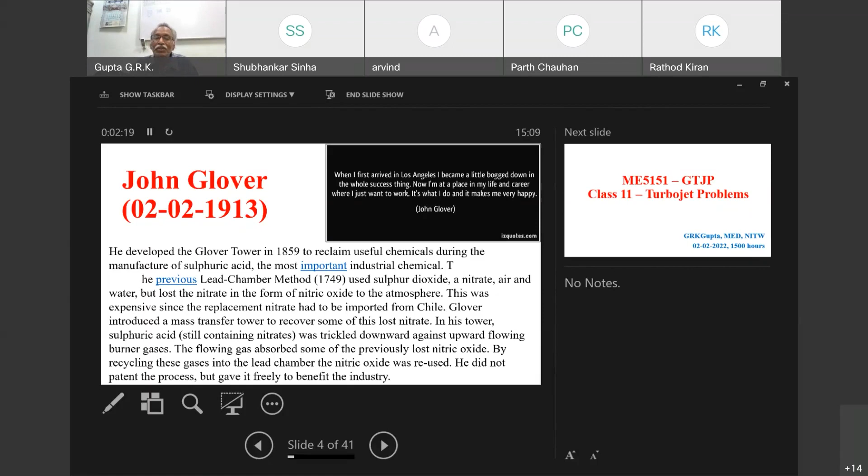He did not patent the process. This is very important because many people try to cash in on everything they find. But he did not patent the process and gave it freely to benefit the industry. There are few people who give everything they found for the benefit of society or the industry. That is the greatness of John Glover.

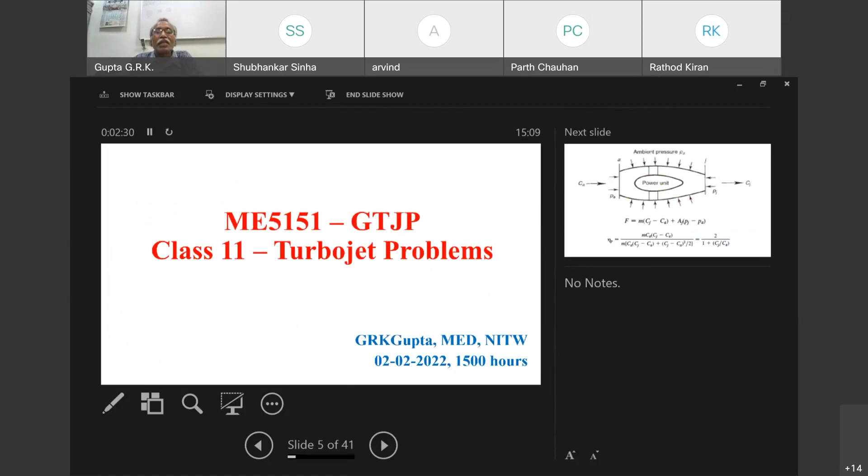Okay, so today we will have this class. Last class we discussed the different expressions for thrust. We have seen that there is momentum thrust and pressure thrust. If the expansion is complete, pressure thrust is zero.

If the pressure expansion is not complete, incomplete expansion, if there is choking, then the jet pressure will be more than the atmospheric pressure, which is critical pressure. So then there will be additional expansion outside the aircraft due to which it gets thrust. That is called pressure thrust, given by Aj into Pj minus Pa. It is due to the pressure difference.

And there is some kinetic energy loss, which is Cj minus Ca whole square by 2. Adding thrust power and kinetic energy loss, we get propulsive power. Thrust power to propulsive power is called the propulsive efficiency. We have seen that if you compare F and propulsive efficiency, if one increases, the other decreases.

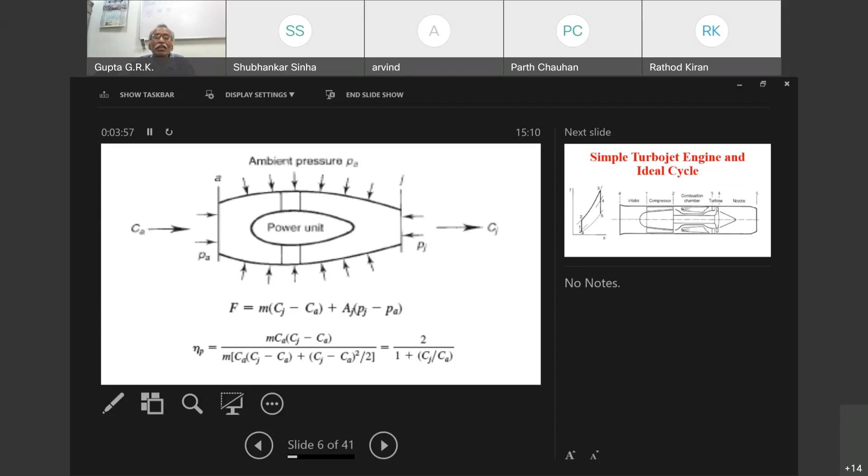If Ca equals zero, I get the maximum thrust. But at that point, the propulsive efficiency will become zero. And if propulsive efficiency wants to be maximum, Cj should be equal to Ca, that is static conditions, then thrust will be zero. Okay, so that's what we discussed in the last class.

If you take a simple turbojet cycle, A is the intake, A to 1 is the intake, 1 to 2 is the compressor, 2 to 3 is the combustion chamber, 3 to 4 is the turbine, and 4 to 5 is the nozzle. The ideal cycle will be like this. In the real cycle, you have losses everywhere you have to show.

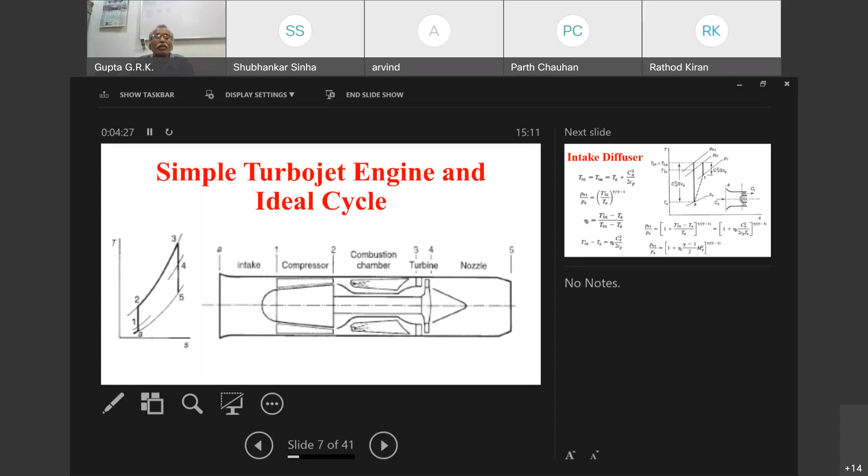Because of the losses, if you add C1 square by 2Cp, then you will get T01, so T01 equals T0. But P01 is less than P0A because of the increase in entropy. There will be a total pressure loss, so P01 will be less than P0.

So the efficiency of the intake will be given in two ways, either intake efficiency or RAM efficiency. For intake efficiency, it is T01 dash minus TA by T0A minus TA. T0A minus TA is nothing but T01 minus TA, which is CA square by 2Cp.

So T01 dash, what we are interested in, is finding P01 and T01 because they are the intake conditions for the compressor. I have to get P01 and T01.

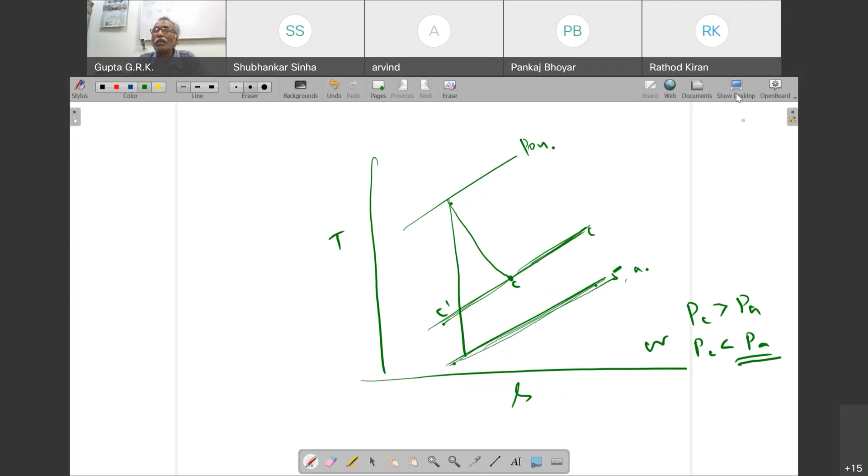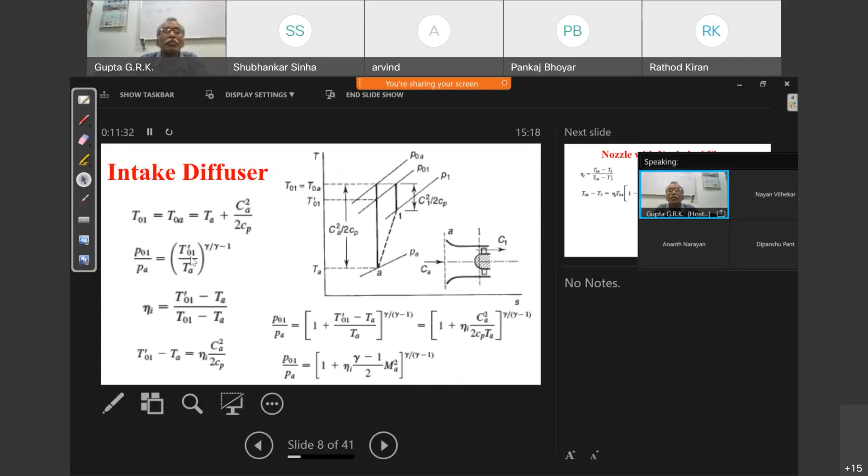I think better I do it. Okay, this is this, and from here, TC dash is equal to T04 minus... so this is the way I get it. And if I want to find out the critical pressure, because if I find critical pressure, then I can check with respect to this. So how to get the critical pressure? P04 by PC, or PC by P04, is equal to TC dash by T04 to the power of gamma by gamma minus 1. So TC dash by T04 I have to know, so divide both sides by T0. So TC dash by T04 is equal to 1 minus, if I take T04 common out of this, 1 by eta J into 1 minus C by...

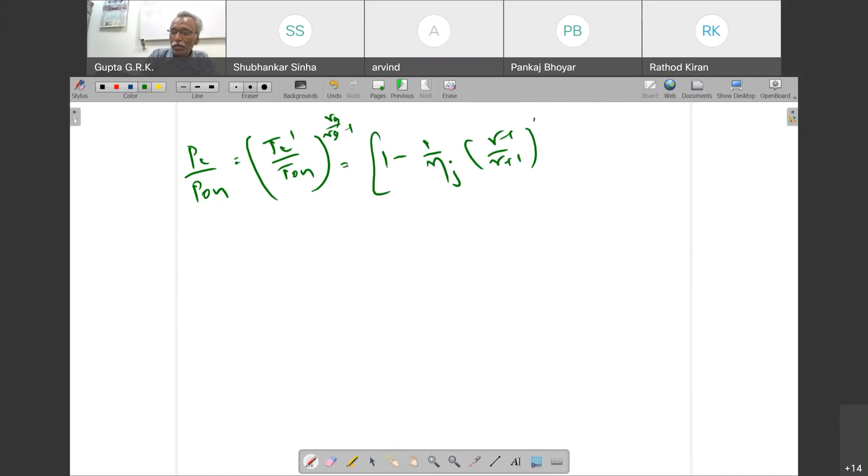So PC by P04 is equal to TC dash by T04 to the power of... okay, this is the formula. So from this, I can get what is PC, because P04 and T04 are already known, so I can get PC.

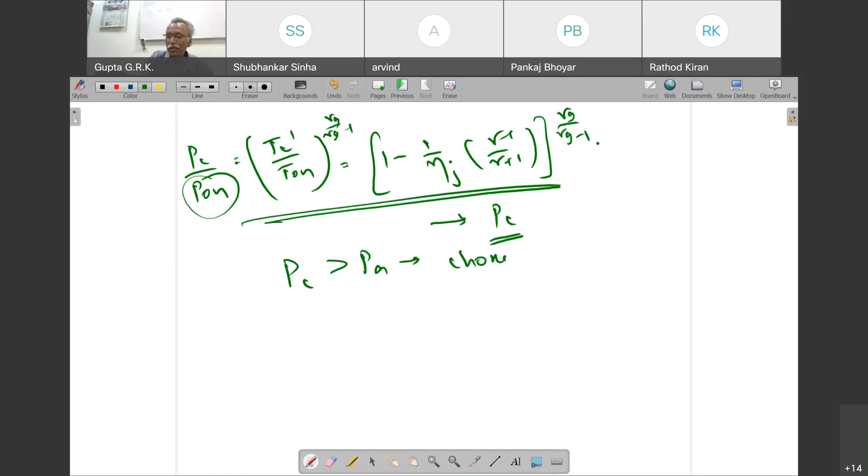Now you check whether PC is greater than PA or less than PA. If PC is greater than PA, it is choking, incomplete expansion, and the exit conditions are critical conditions.

If PC is less than PA, then complete expansion, and P5 is equal to PA. That is this, so in that way I have to see which conditions apply. And if this is the choking, then there will be pressure thrust, because both are different. If PC is less than PA, because P5 equal to PA, no pressure thrust.

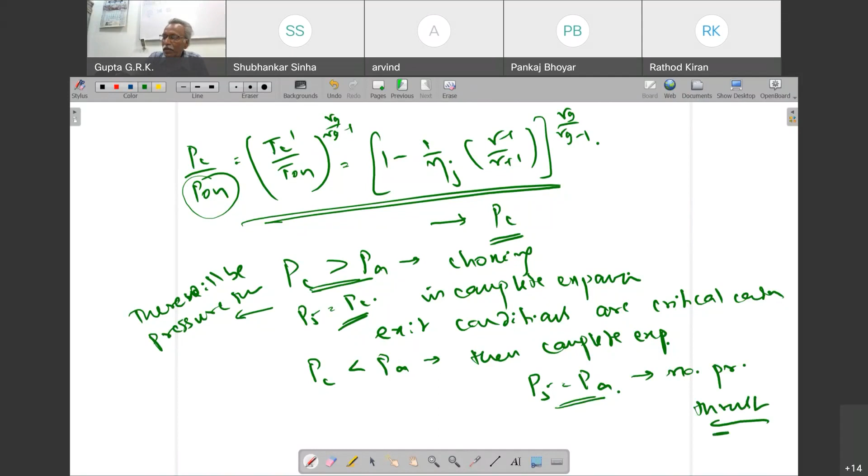Okay, this I have to check. We will see a problem then. Till now, is it okay?

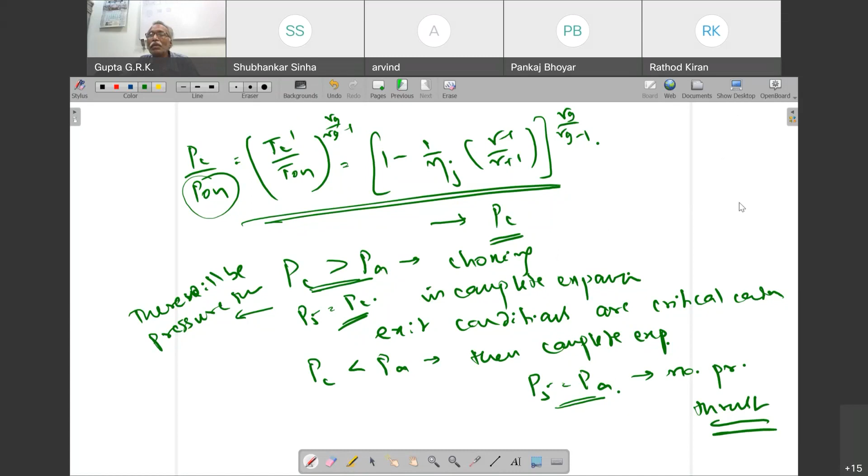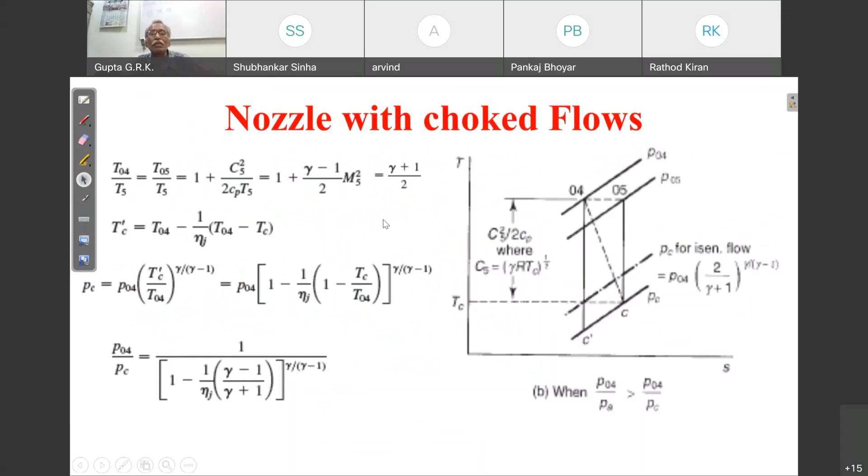Once I know the turbine exit conditions, critical pressure is corresponding to Mach number 1. I could not listen, the voice is not clear. So critical pressure will be corresponding to Mach number 1. Just a minute, I will reduce this.

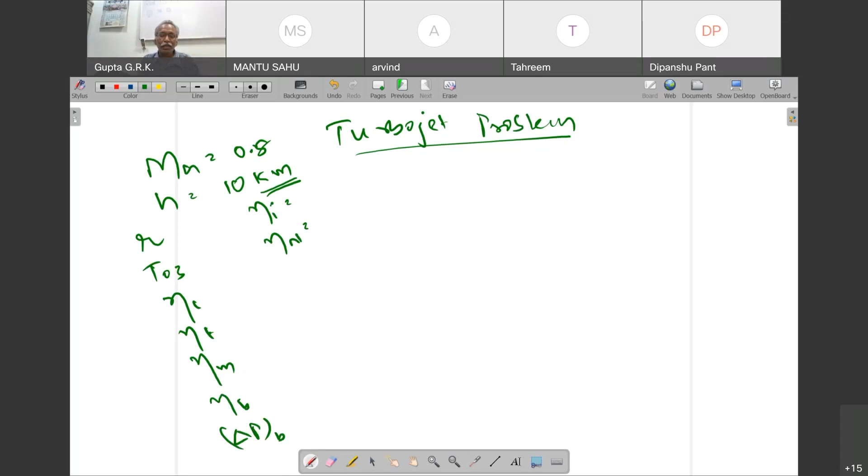So we will see those data. You have Mach number 0.8, altitude 10 kilometers, compressor pressure ratio 8, T03 1200 Kelvin, efficiency of compressor, efficiency of turbine, efficiency intake and propelling nozzle, mechanical efficiency, combustion efficiency, delta Pb. These data will be given to you. And I have to get the specific thrust and specific fuel consumption.

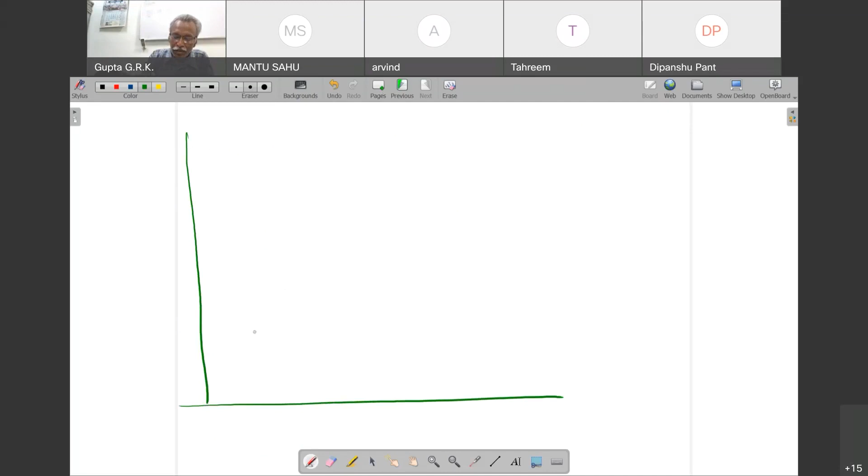So I will tell you stepwise how to go about it. This is A, this is 0A, this is 01. This is for diffuser. And the 01, it enters compressor.

So this will be 02 dash. And there is some pressure loss, I will get 03. Then turbine up to 4. This is 04 dash. And from here 5.

5 dash 5. If there is complete expansion, then this and this will be same, but I don't know whether this and this coincide or not. It depends on whether it is complete expansion or incomplete expansion. If these two coincide, P5 equal to PA, then it is complete expansion. If I have convergent divergent nozzle, then there will be complete expansion and P5 will be equal to PA.

Am I clear about this? Yes sir. Okay, once you understand it, we start calculation. And at 10 kilometers, get PA, comma, TA. These two data from atmospheric tables.

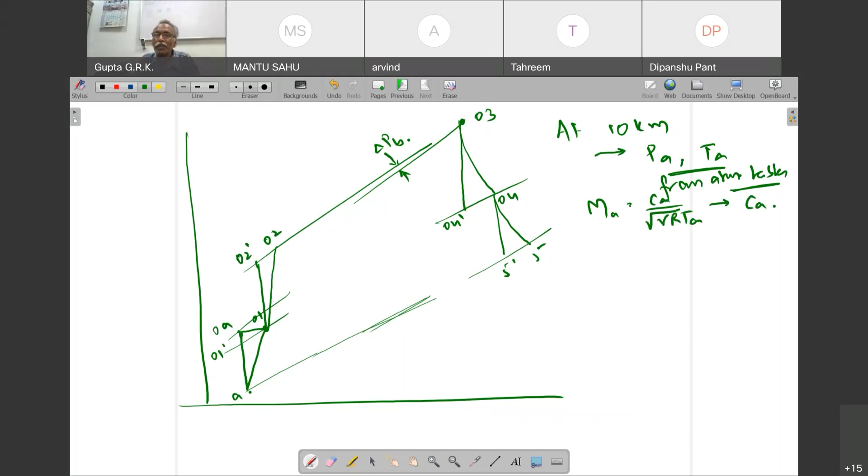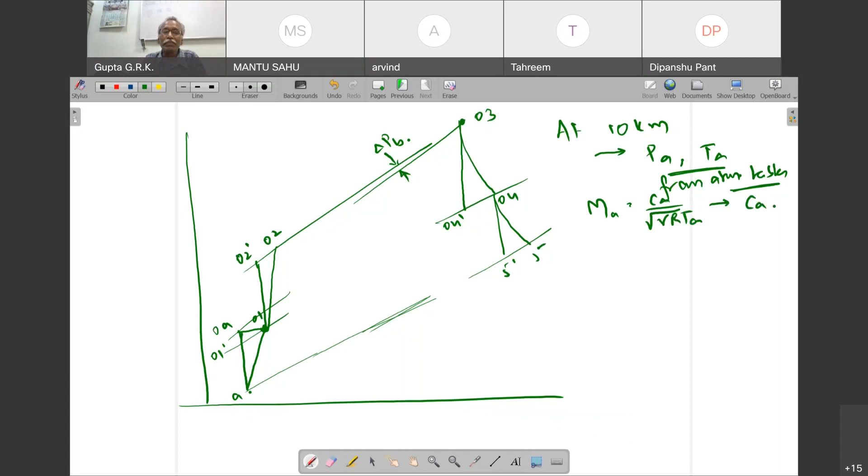So I get Ca. Then first thing is I have to get P01 and T01. So to get P01, T01, first T01 equal to TA, T0A. So T01 is equal to T0A is equal to TA into 1 plus gamma minus 1 by 2 M squared. This is standard formula. T0A by TA is 1 plus gamma minus 1 by 2 M squared. This gives you T01.

Okay, so then get T01 dash. For that intake efficiency ηi is equal to T01 dash minus TA by T01 minus TA. So T01 is nothing but T0A. So this gives me

T01 dash. Once I get T01 dash, the temperature ratio gives me pressure ratio. So P01 by PA is equal to T01 dash by TA to the power of gamma A by gamma A minus 1. So this gives me P01. This completes the diffuser calculation. Is this okay?

Yes sir. So once I get P01, T01, next it will be like the gas turbine calculations only. So we will see step by step. So P01 and T01 are known. Then P02 is equal to RP01, because pressure ratio is given, I can get that.

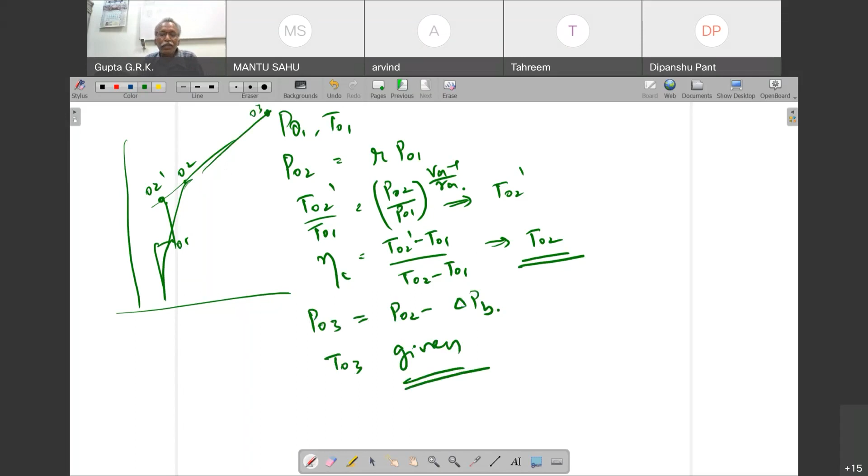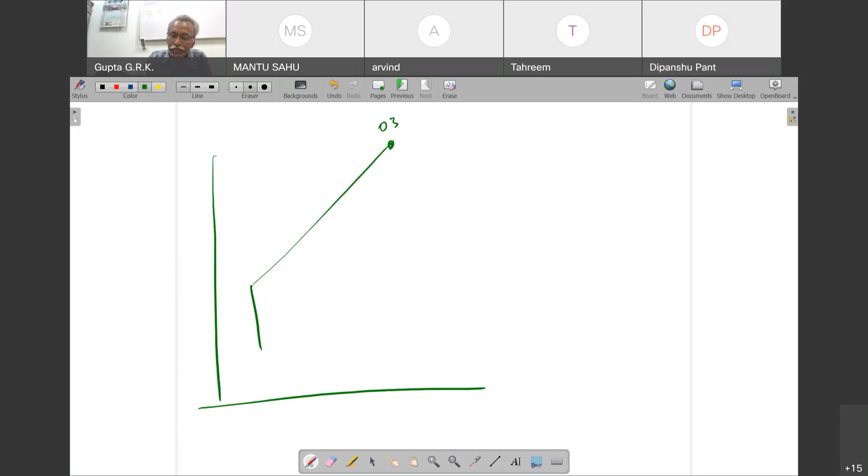Okay, no problem up to this. Then I have to get the turbine. So what is that I have to get? I have to get T04 and P04. How to get that? Anybody can suggest me?

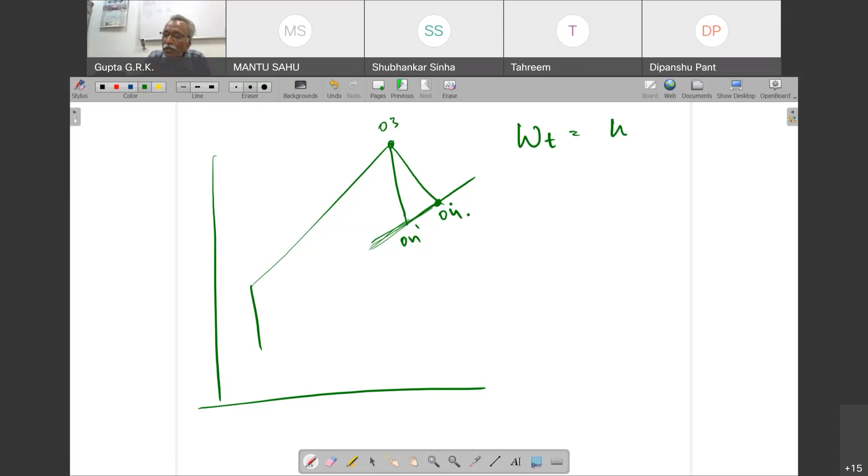Here, how much it has to produce? How much work it has to produce? Sir, compensate the compressor work. Yeah, because it runs compressor only that much. Okay, so turbine work I will get from the compressor work. So W turbine is equal to W compressor by mechanical efficiency. Am I right? Yes sir. So, CPG into T03 minus T04 is equal to CPA into T02 minus T01, divided by mechanical efficiency, out of which the unknown is only T04. I will get T04.

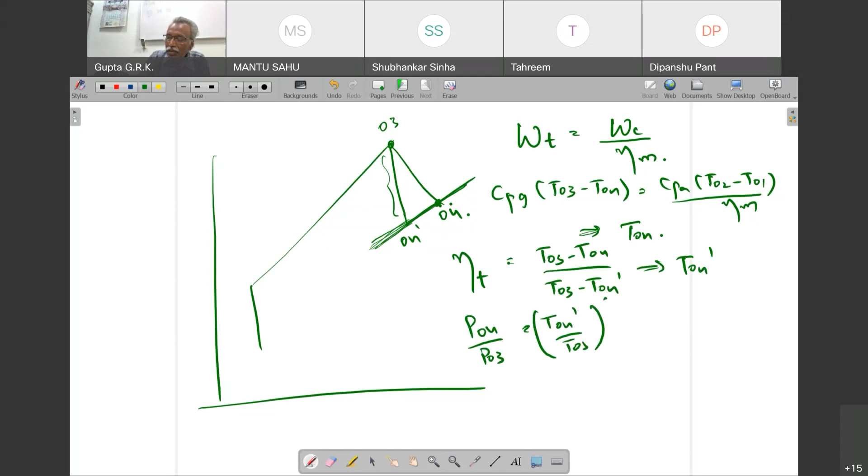And once I get T04, I have to get P04. How to get P04? I have to get this pressure, which is obtained from this temperature ratio using isentropic efficiency. Turbine efficiency is T03 minus T04 by T03 minus T04 dash, so this gives me T04 dash. Then P04 by P03 equals T04 dash by T03 to the power of gamma g by gamma g minus 1. This gives me P04.

Okay, so turbine exit also it is over. Is it okay till now? Yes, sir. Okay, then I have to come to the nozzle.

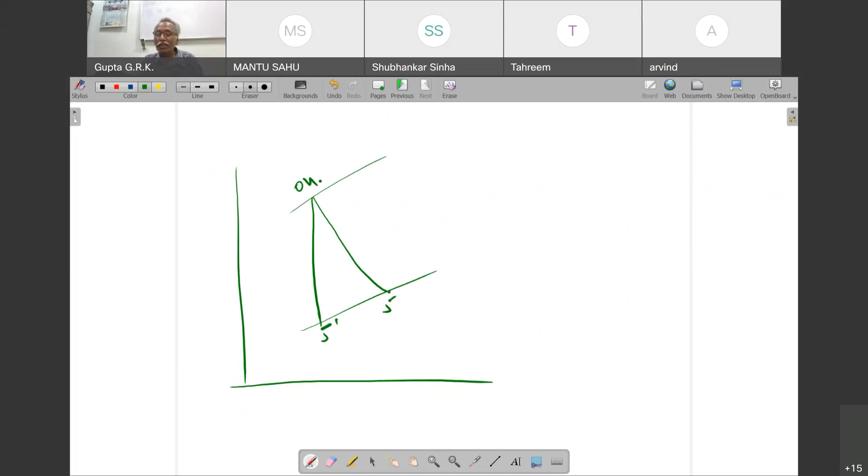So first I have to calculate PC. We got P04 by PC equals 1 minus 1 by eta j into gamma minus 1 by gamma plus 1, to the power of gamma g by gamma g minus 1. So because P04 is already known, you can get PC from here.

Okay, so now you check PC and PA. And in this problem, you will get PC greater than PA. So now it is choked, because it cannot expand up to here, it can expand only up to here. By that time, the Mach number is 1. Is it clear? So this is the exit.

This I will take it as 5 or 5 dash and 5. So this is atmospheric pressure. Okay, so once I know this, then I have to get the critical conditions. Exit conditions are critical conditions.

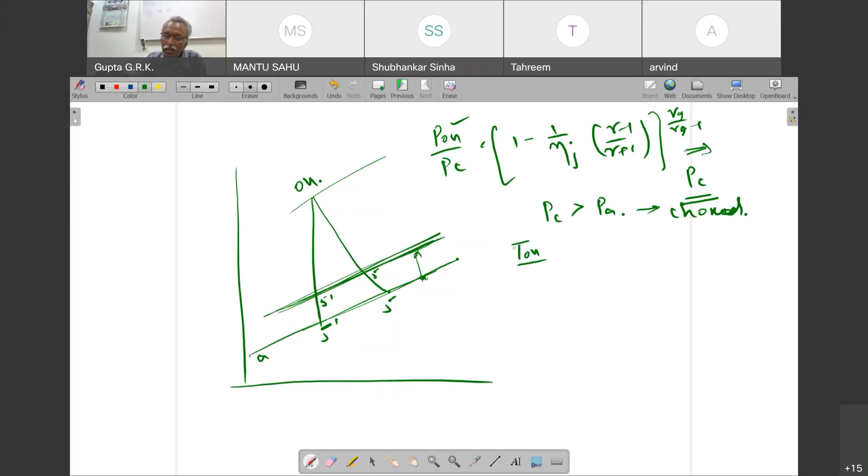Now TC. Okay, so T04, because T04 is T05. So T05 by T5 is gamma plus 1 by 2, because 1 plus gamma minus 1 by 2 M square. M5 is 1, so gamma plus 1 by 2. So T05 is already known, which is equal to T04, so this will give me T5.

Okay, so once I know that, anyhow, I can get critical pressure. Critical pressure formula also will be there. P5 by P05 is 2 by gamma plus 1, to the power of gamma G by gamma G minus 1. So this is the critical pressure.

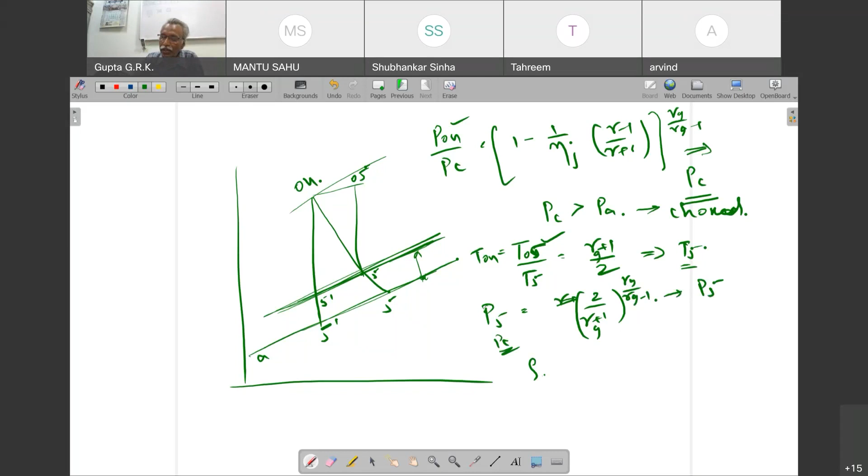Critical pressure formula is this, because P5 by P05 is T5 by T05 to the power of gamma by gamma minus 1. This will give you P5. And rho 5 is equal to P5 by R T5. Okay, so these are the things. And C5, that is Cj, is equal to root gamma R T5.

Are these formulae clear? Because it is sonic velocity, jet velocity is sonic velocity. If I know the temperature, root gamma RT will give me the sonic velocity.

Sir, yes? So PC we have determined already. So PC is equal to P5. So here the formula is also given. So which will be used? Somehow your voice is not audible. I could not see the chat box, that's the main problem. Okay, maybe after the class we will discuss.

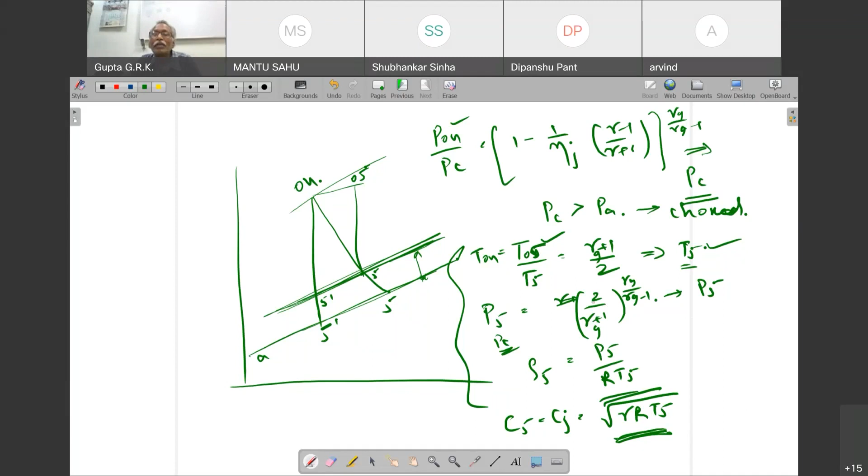Sir, okay, can you repeat after T naught, sir? Can you repeat after T naught, sir? Sir, he's saying, can you repeat after T04? Okay, so T04 equal to T05, right? This is okay.

In nozzle, there is no work transfer, there is no heat transfer. So in the nozzle, exit stagnation temperature is equal to inlet stagnation temperature, T04 equal to T05. Is this clear? Delta Q is equal to dH naught plus delta W. This is 0, this is 0, dH naught is 0, right? So H naught is equal to constant, or T naught equal to constant. So T04 equal to T05 in the nozzle.

And if there is choking, so T05 by T5 is equal to 1 plus gamma minus 1 by 2 M5 square, and this is 1. So 1 plus gamma minus 1 by 2 is gamma plus 1 by 2, the critical temperature ratio, you must be knowing about this. So that's why I can get T5. Is that okay?

Yes, sir. Then P05 by P5 is equal to T05 by T5 to the power of gamma G by gamma G minus 1. So this will give me P5.

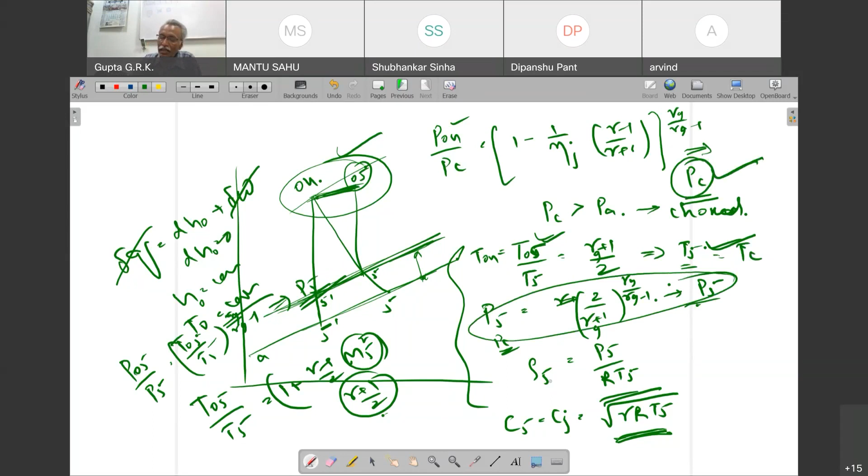Or actually this PC itself, I need not calculate P5, okay? This is not necessary, already PC is calculated. So PC is there, TC is there, and rho C is PC by RTC, and jet velocity is equal to root gamma RTC. So after this, you can do it.

And once I do that, I got jet velocity, right? Jet velocity is the one which I am interested in. And jet pressure also is needed, because now the thrust is equal to F momentum thrust plus F pressure thrust. And momentum thrust is, and I will take specific thrust, okay, per unit mass flow, Cj minus Ca plus Aj by m dot into Pc minus Pa.

So this is the critical pressure, and this is ambient pressure. And Aj by m dot, how to get it? M dot is equal to rho 5, A5, C5. C5 is jet velocity, A5 is nozzle area. So A5 by m dot is equal to 1 by rho 5 C5. Rho 5 is known, C5 is known. I substitute here, so Cj minus Ca plus 1 by rho 5 C5 into P5 minus Pa. So this is the way I get the specific thrust.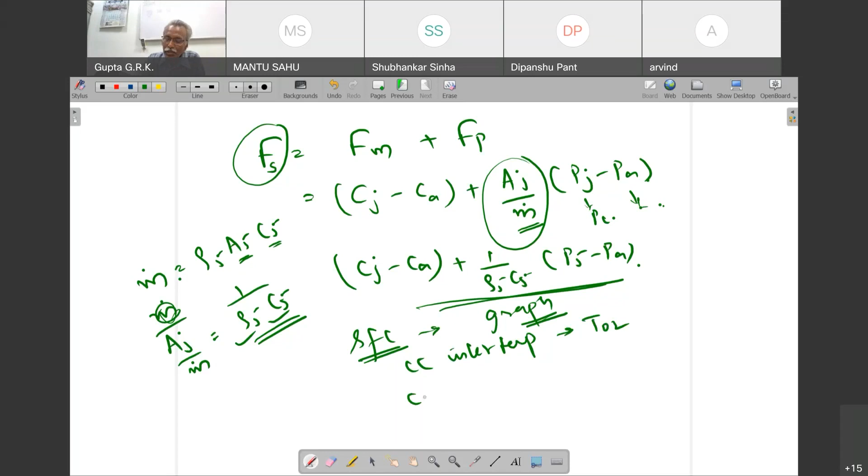And then SFC is to be found out. For this again, I have to use the graph. For the graph, what I have to know is the inlet temperature to the combustion chamber, that is T02, and combustion chamber temperature rise, that is T03 minus T02. This gives me fuel air ratio theoretical. Then fuel air ratio actual is theoretical fuel air ratio by combustion efficiency, which is given to you. So fuel air ratio I can find out. So once F is known...

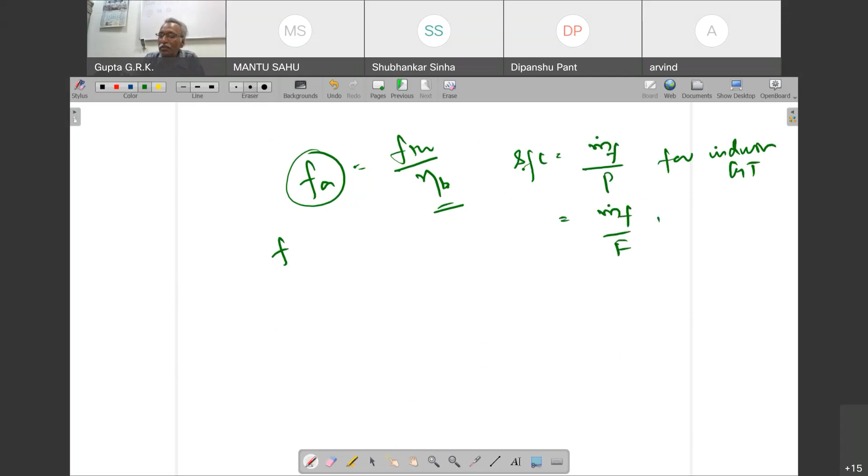So the SFC is m dot F by... here one thing, for gas turbines, industrial gas turbines, SFC is m dot F by power. But this is m dot F by thrust for aircraft engines, so you have to know this. So this is nothing but m dot F by m dot A, specific thrust, that is F by Fs. F is known here, Fs is already calculated, so I can get SFC.

This is kgs per Newton seconds. Because m dot F is kgs per second, and this is Newtons, Newton per kg, then it will be like kg... this has no units... here this is kgs per... it is 1 by Fs, units will be 1 by Fs. This is not having any units. 1 by Fs means kgs per Fs. Fs is F by m dot, that is Newton second per kg. And so this is kgs per Newton seconds.

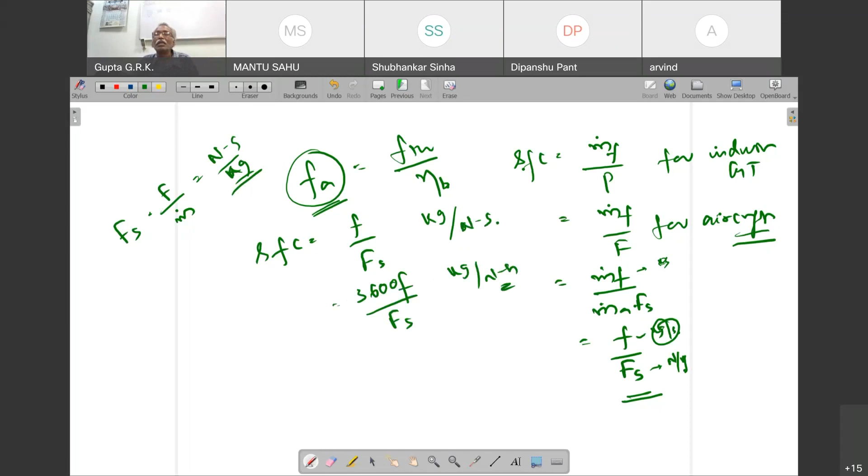And if you actually multiply by 3600, I will get the kgs per Newton hour. Just I will check it. I think this is the one. This is the way I have to go about.

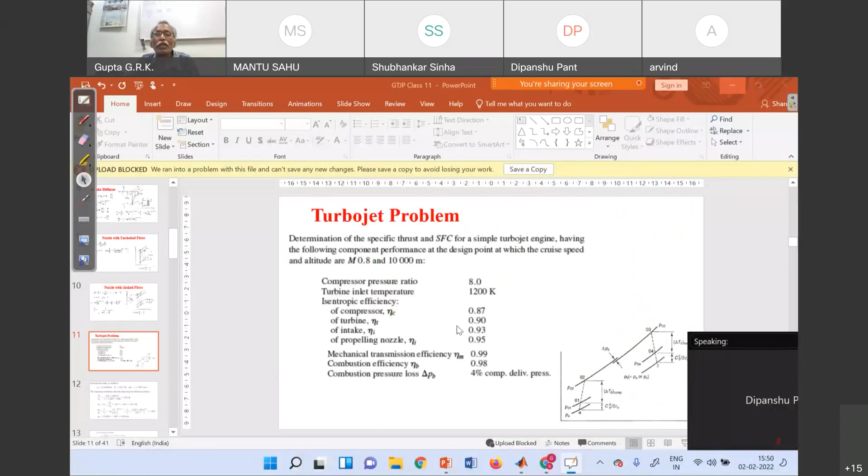Now you can see the stepwise procedure for the turbojet problem. So from ISA table, that is International Standard Atmospheric Tables, at 10,000 meters, PA is this, TA is this, and at their sonic velocity is this. Sonic velocity is nothing but root gamma RT. So these three will be available at different altitudes.

Now, the T01 is equal to TA plus CA square by 2CP, because CA is known. CA square by 2CP I can calculate here, and so here T01 is obtained. So P01 I can get from here. So T01 and P01 using this direct formula he has found out. T01 dash he didn't find, so you can do that way, that will be easier instead of remembering this formula.

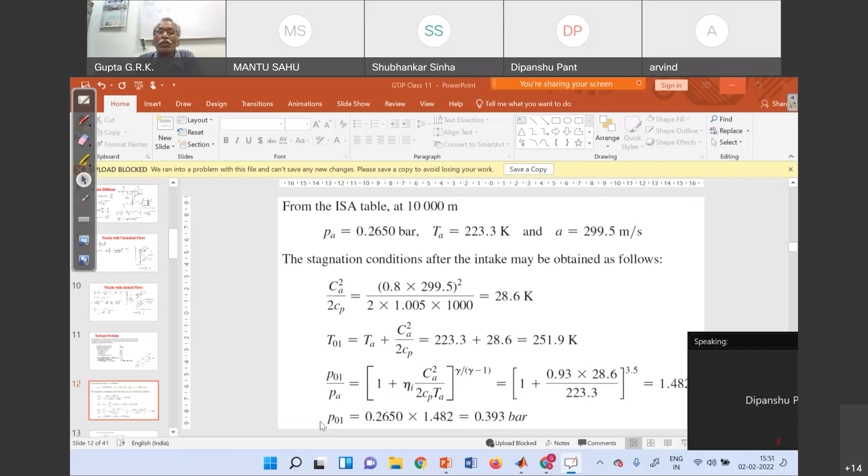So get P01 and T01. Then P02 is equal to RP01, so 8 into this. And T02 minus T01 is this. So again he has found out direct formula, but we are doing T02 dash first you find out, and then T02 you find out.

So now this is the formula, W turbine is equal to WC by mechanical efficiency. So from this I get T04. And the P03 is equal to P02 minus the combustion pressure losses, so this gives me P03. And here T04 dash, again using the turbine efficiency, I get like this, and P04 is obtained.

So once you get P04 and T04, then you get the critical pressure. P04 by PC, this formula is there, so from this formula you can find out this. Then you check: here you found out P04 by PA is greater than P04 by PC, or if you reverse it, PA will be less than PC. So if PA is less than PC, that is PC is more, so it will be choking. And so the critical temperature is 2 by gamma plus 1 T04, and the critical pressure is this.

And rho 5 is PC by RTC, and C5 is root gamma RTC. And A5 by M is equal to 1 by rho 5 C5, right? And then the thrust, C5 minus CA plus A5 by M into PC minus PA. A5 by M is 1 by rho 5 C5, I told you. So this is the way I get the momentum thrust and pressure thrust. So you can see that pressure thrust also is quite a good amount. This is the total.

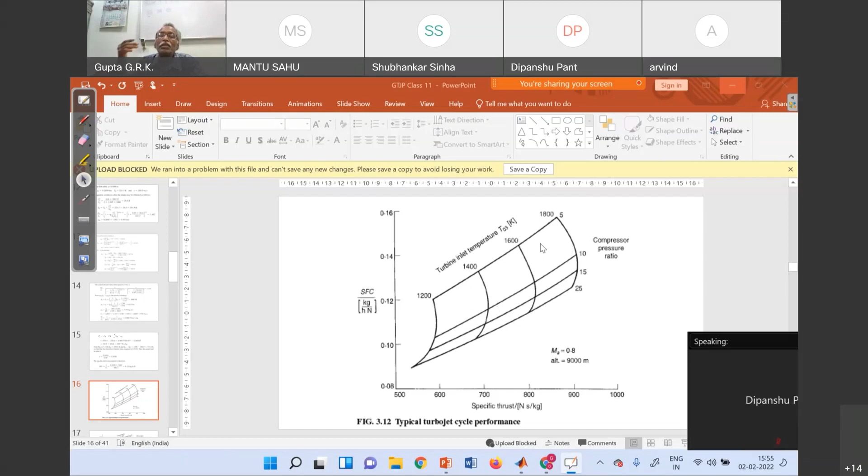And this particular graph is very, very useful. Why? Because, as I told, based on how much SFC I want, based on how much thrust I want, I need to define which area I have to choose. Based on that, I can choose what turbine inlet temperature, what pressure ratio is needed. Okay, I will show you another graph. These are the design considerations.

Okay, another thing: as turbine inlet temperature increases, what happens? The cost increases because I need higher grade, costly materials to withstand those temperatures. And its life also decreases. As turbine inlet temperature increases, the life decreases and cost increases. So these things I have to keep in mind.

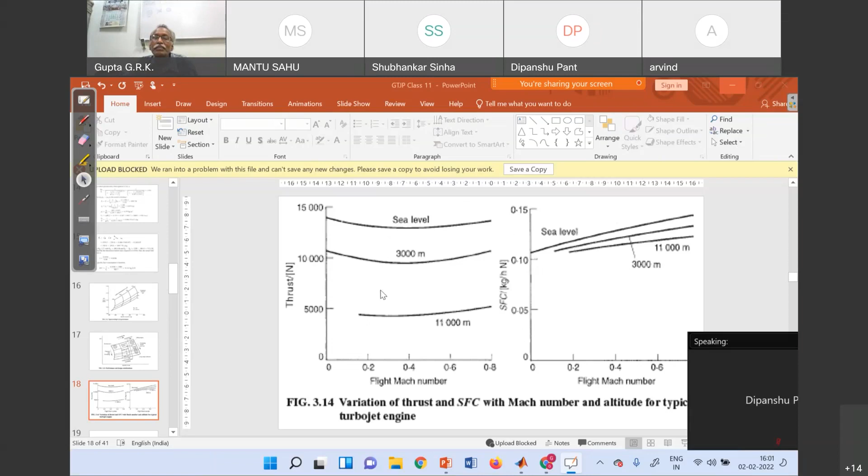Yes, sir. Yeah. So then we go to what is called as turbofan.

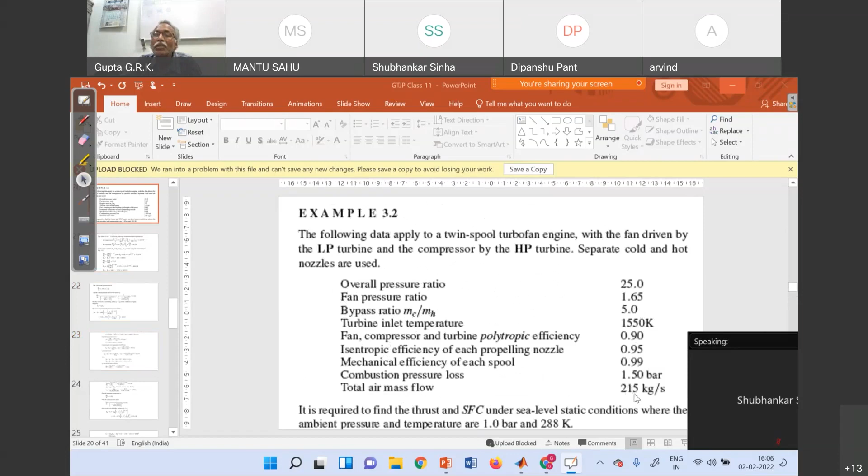Okay, anyhow, don't worry about the formula. You know the total mass flow, and total mass flow is 215, and m dot C by m dot H is 5. So from this I have to find out what is m dot C. Here it is something like this.

M dot C by m dot H is B. And total mass flow m dot is equal to m dot C plus m dot H. So if I divide this by m dot H, this is B, this is 1, B plus 1. So m dot H is m by B plus 1, because m dot by m dot H is B plus 1. So then m dot C, from this, m dot C is equal to B times m dot H, or m B by B plus 1.

Okay, this is the formula as used. M dot B by B plus 1. So that is the way. And the cold thrust I can find out.

In the same way, now I have to find out what are the HP turbine exit conditions. HP turbine work is equal to compressor work. So CPA into fan work is — this is some value, that was previously found out here.

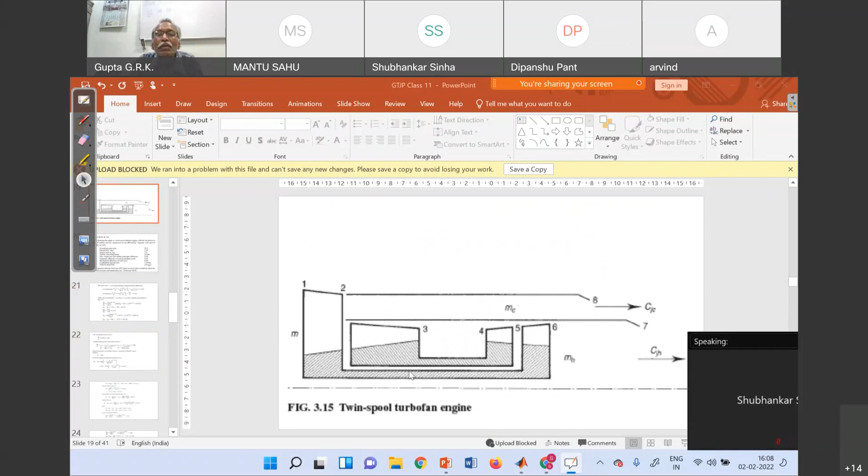T04 minus T05. So T04 minus T05 is equal to CPA by mechanical efficiency times CPG into T03 minus T02. So from this, I can find out what is the HP rotor work. Similarly, LP rotor work, I will get it is equal to T02 minus T01 into CPA by CPG.

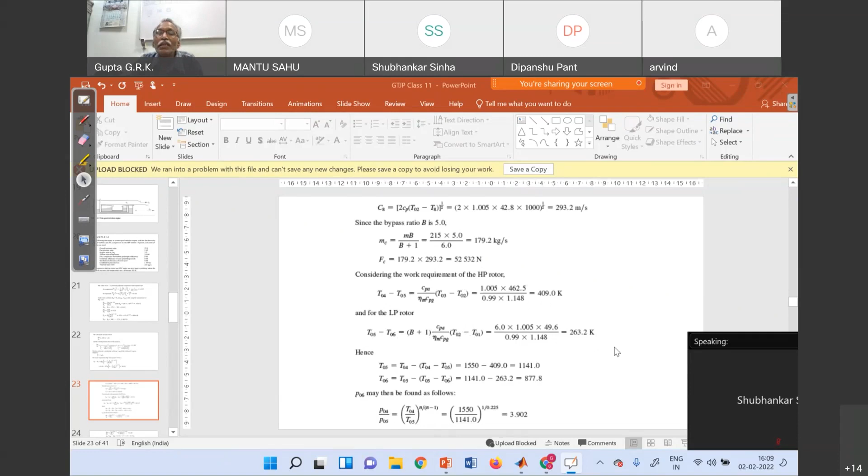So this is the way I can find out what is the turbine work for the HP turbine and LP turbine, based on the compressor work and the fan work. So this is the way I can get the exit temperatures, T05, T06. So in that way, I can get the exit conditions of the second turbine also.

Once I get that, then I can find out again what is the critical pressure here. And fortunately, this is also unchoked. So because it is not choked, there is no pressure thrust, and the exit conditions will be atmospheric conditions only. And based on that, I have to calculate what is the velocity of the jet.

And hot air is m by B plus 1, and so hot thrust is this much. And cold thrust plus hot thrust is this. And again, you have to find out the fuel air ratio from the graph.

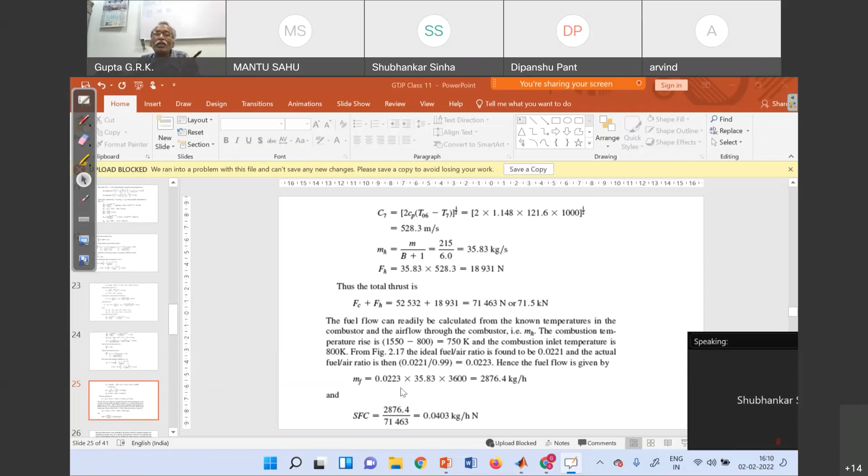And by 0.99 combustion efficiency will give me the actual fuel air ratio. And because mass flow of air I know, multiply that by this, so I will get the mass flow of fuel. And mass flow of fuel is known, total thrust is known, so mass flow of fuel by total thrust will give me SFC.

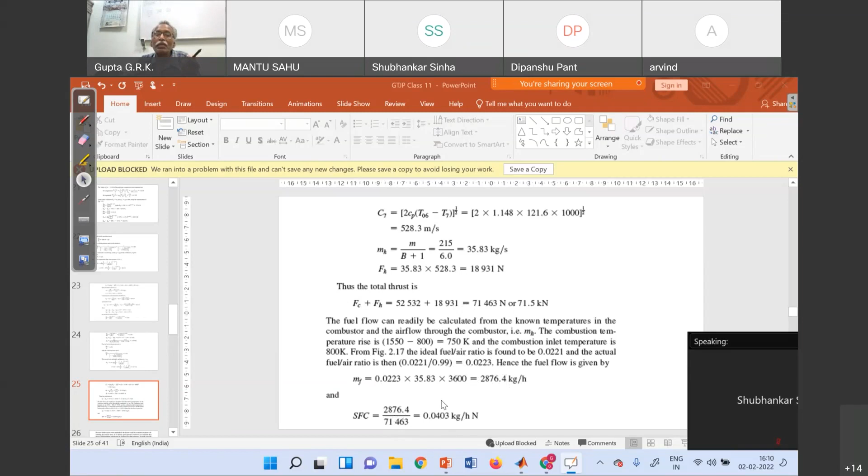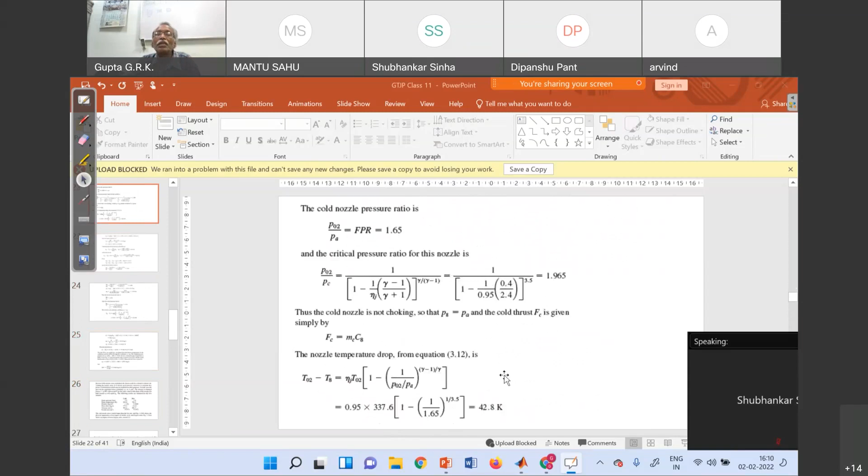Okay, so this is the way I can find out. So you solve the problems, so you can understand how to do that. Go through the worked examples and also the exercise problems, because the next assignment will be based on that.

You know where the problems are in the book? At the end, before the index, you have problems given for all the chapters. I've already given the gas turbine cycles. The next chapter will be turbine cycles, the third chapter. So next assignment will be these problems. Go through that, and if you have any difficulty or lack of understanding, ask in the next class.

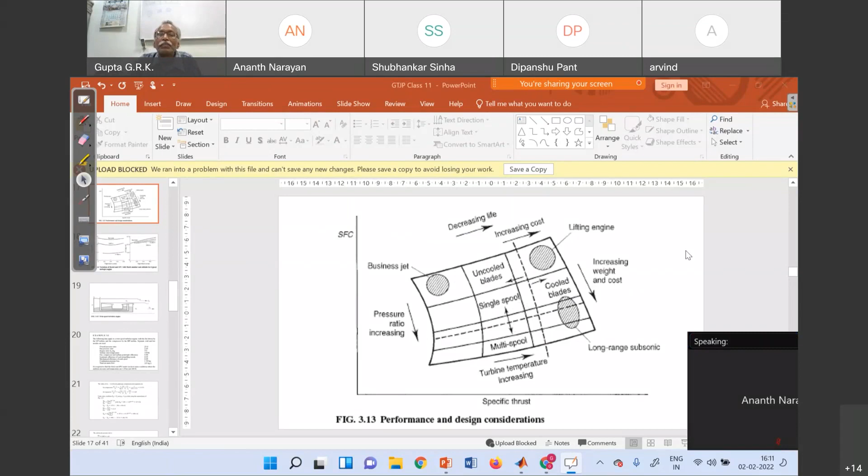Okay, so it is about some personalities. His name is synonymous with intelligence, yet it wasn't always that way for him. As a child, he didn't start speaking until he was 4, and couldn't read until he was 7, and was thought to be mentally handicapped. Who is this person?

Is it Albert Einstein? Yeah, very good, it is Einstein. He went on to win a Nobel Prize and altered the world's approach to physics. I guess he was just thinking of the right thing to say for those first 4 years. So this is great Albert Einstein. That's why don't worry if someone is weak or mentally challenged or thought small like this. We don't know how people change. He says weak people revenge, strong people forgive, intelligent people ignore.

So there is another person we will see. He is a basketball player. If anybody has a habit of playing basketball, I think you will know his name. He has missed more than 9,000 shots in his basketball career. He has lost almost 300 games. On 26 occasions, he was entrusted to take the game-winning shot and he missed. He has failed over and over and over again in his life, and that is why he became successful. Anybody knows his name? Michael Jordan.